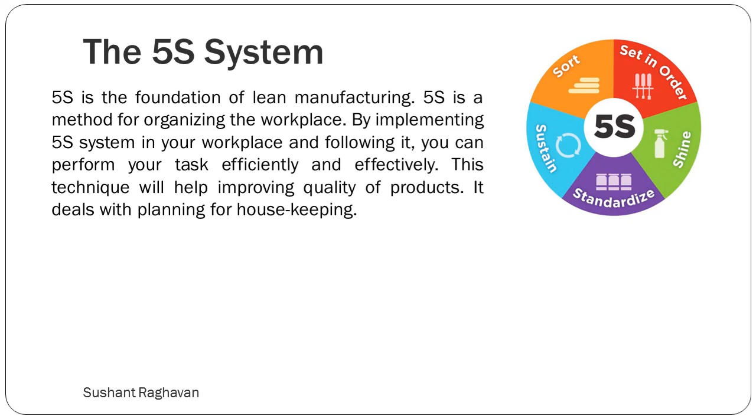5S is the foundation of lean manufacturing. It is a method for organizing the workplace. By implementing the 5S system in your workplace and following it, you can perform your tasks efficiently and effectively. This technique will help improve the quality of products. It deals with planning for housekeeping.

In the early 20th century, the manufacturing industry witnessed a significant shift as it switched over to mass production. The manufacturers were now setting eyes on international markets. In this race to gain market share, companies had to improve upon a number of factors such as efficiency, waste, speed, and consistency to surpass their regional and international competition.

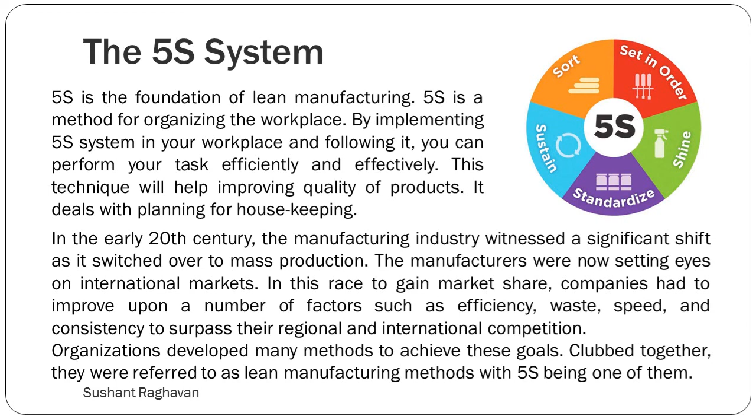Organizations developed many methods to achieve these goals. Clubbed together, they were referred to as lean manufacturing methods, with 5S being one of them.

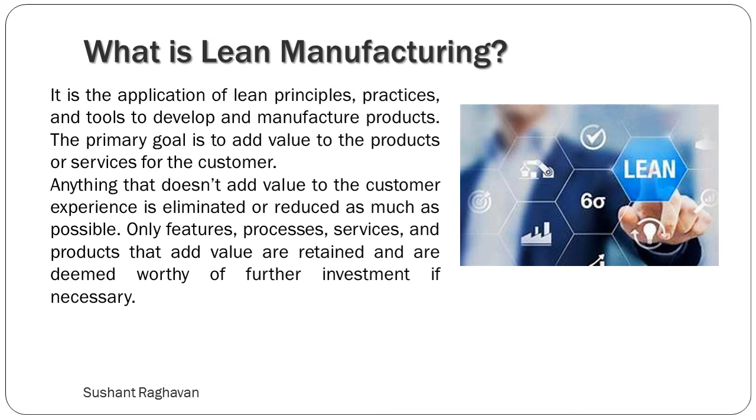What is lean manufacturing? It is the application of lean principles, practices, and tools to develop and manufacture products. The primary goal is to add value to the products or services for the customer. Anything that does not add value to the customer experience is eliminated or reduced as much as possible. Only features, processes, services, and products that add value are retained and are deemed worthy of further investment if necessary.

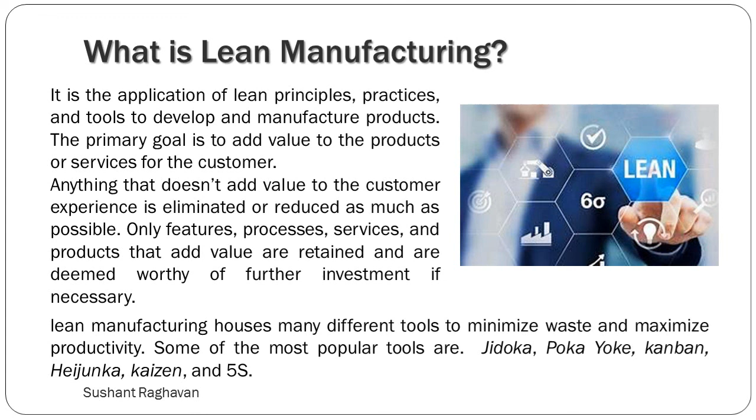Lean manufacturing houses many different tools to minimize waste and maximize productivity. Some of the most important tools are Jidoka, Poka Yoke, Kanban, Heijunka, Kaizen, and 5S.

What is 5S? 5S is a 5-step process to improve workplace efficiency developed by Hiroyuki Hirano. It originated in Japan, where the 5 steps are known as Seiri, Seiton, Seiso, Seiketsu, and Shitsuke. These steps, when put into practice, will reduce waste and elevate the safety standards of companies.

A cluttered workplace can lead to part and tool misplacements, mistakes, production slowdown, and even injury. This can affect production efficiency and cause a loss of reputation. By organizing the workplace, employees can avoid such instances and all departments can function just as they should.

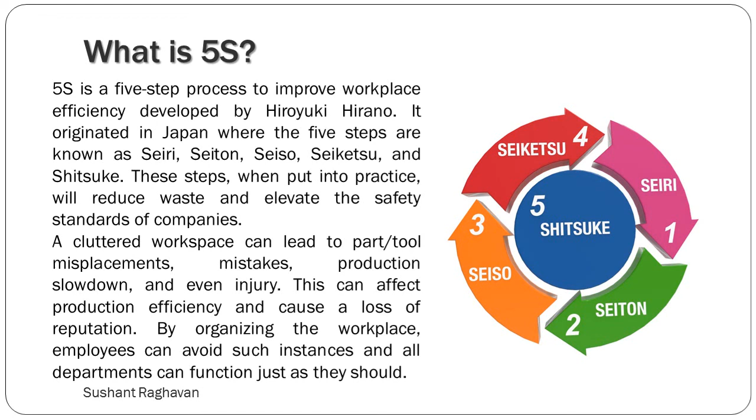5S steps. 5S is an extremely flexible technique that can adjust to different time scales as needed. The 5 steps in 5S are as follows.

Sort: clearly distinguish needed items from unneeded and eliminate the latter. Set in order: keep needed items in the correct place to allow for easy and immediate retrieval. Shine: keep the workplace neat and clean. Standardize: the method by which sort, set in order, and shine are made habitual. Sustain: maintain established procedures. Sort.

The first step in 5S is sort. In this step, the participants sort through their tools and equipment at the workstation and transfer them to their designated storage locations. It also entails the removal of parts, tools, equipment, and materials from the workplace that aren't necessary for the moment. Employees either move them to storage areas or discard them.

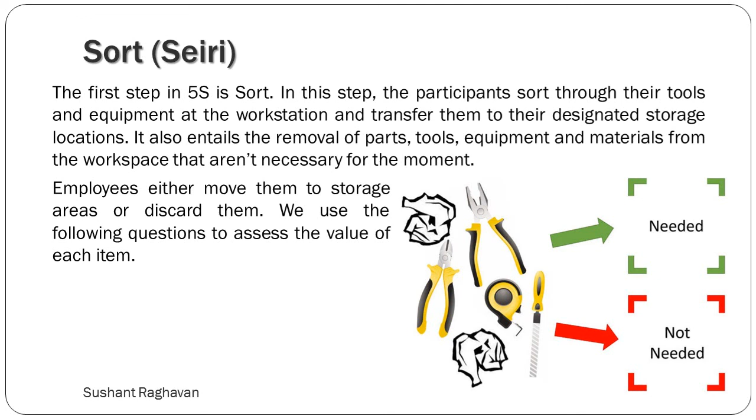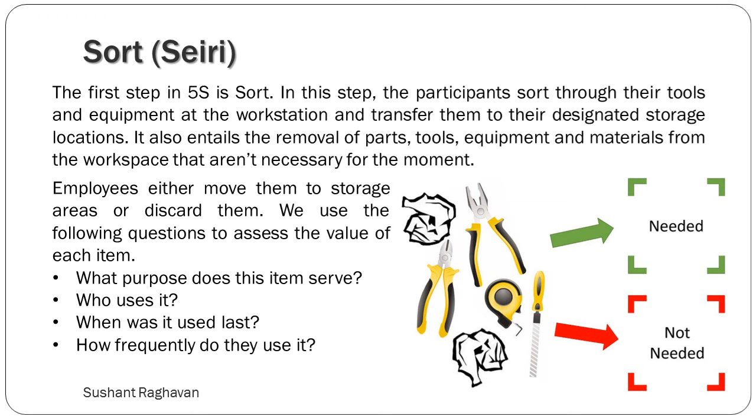We use the following questions to assess the value of each item: What purpose does this item serve? Who uses it? When was it last used? How frequently do they use it? And is it really necessary to keep it here?

The employees using that workstation are in the best position to answer the above questions. They can use the answers to sort items into different categories. The 5S program guides suggest 3 or 4 categories to sort items into.

The 4 categories are: keep, observe, discard, and transfer.

Keep: this category is for items that the employees use frequently. The employees keep them within reach so that minimum time is needed to procure them. We return these items to the target area for the employees' use.

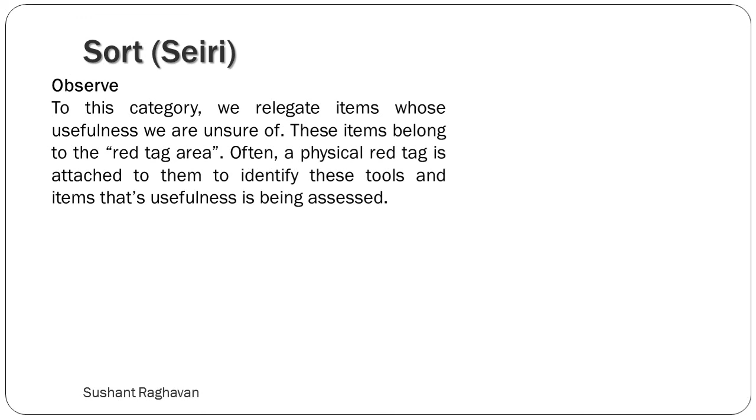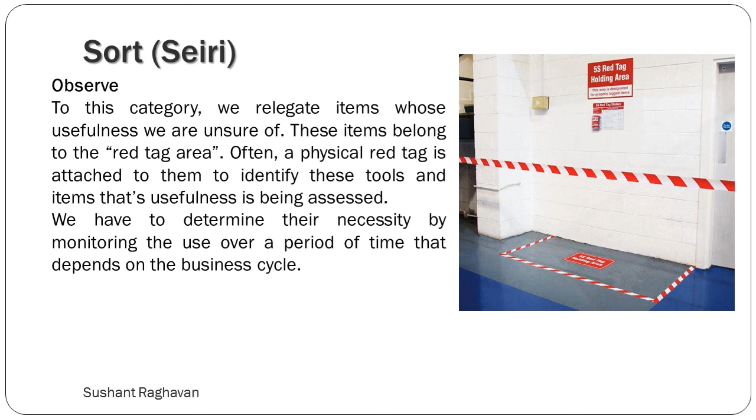Observe. To this category, we relegate items whose usefulness we are unsure of. These items belong to the red tag area. Often a physical red tag is attached to them to identify these tools and items whose usefulness is being assessed. We have to determine their necessity by monitoring the use over a period of time that depends on the business cycle.

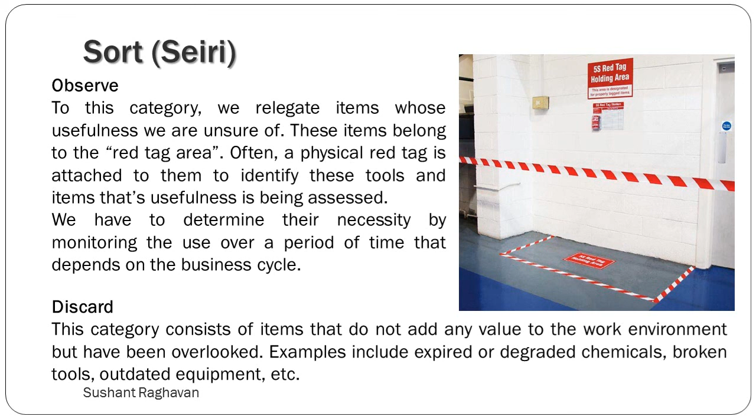Discard. This category consists of items that do not add any value to the work environment but have been overlooked. Examples include expired or degraded chemicals, broken tools, outdated equipment, etc.

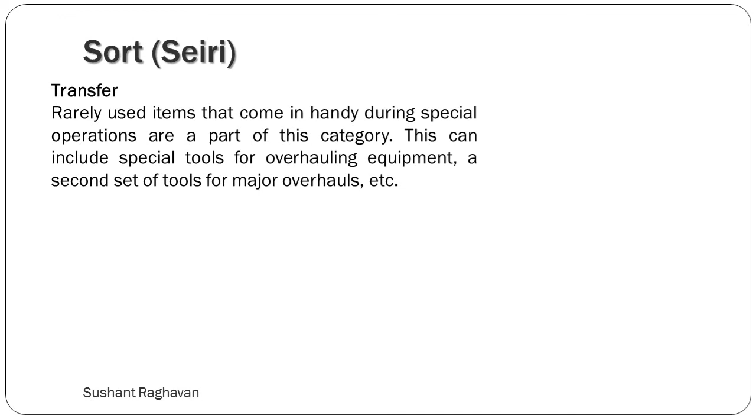Transfer. Rarely used items that come in handy during special operations are a part of this category. This can include special tools for overhauling equipment, a second set of tools for major overhauls, etc. Depending on the nature of items, employees will either store them in a special storage area or move them to a department where they would make more sense.

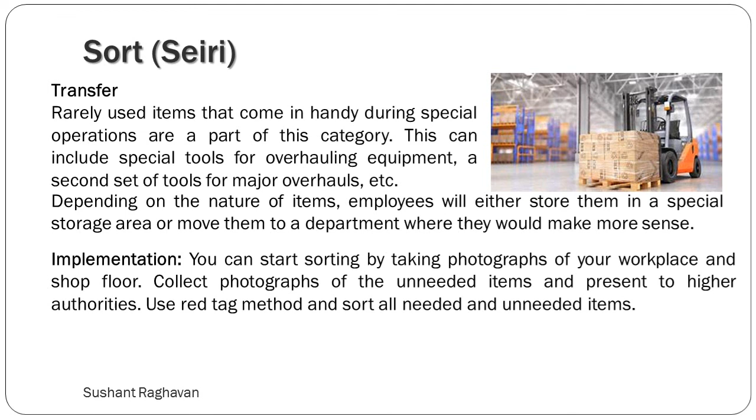Implementation. You can start sorting by taking photographs of your workplace and shop floor, collect photographs of the unneeded items, and present them to higher authorities. Use red tag methods and sort all needed and unneeded items. Remove unneeded items from your work area.

The frequency of sorting will be based on the application. It can be weekly, monthly, quarterly, or annually for spaces such as storehouses or filing cabinets. Some applications may need a daily sorting routine.

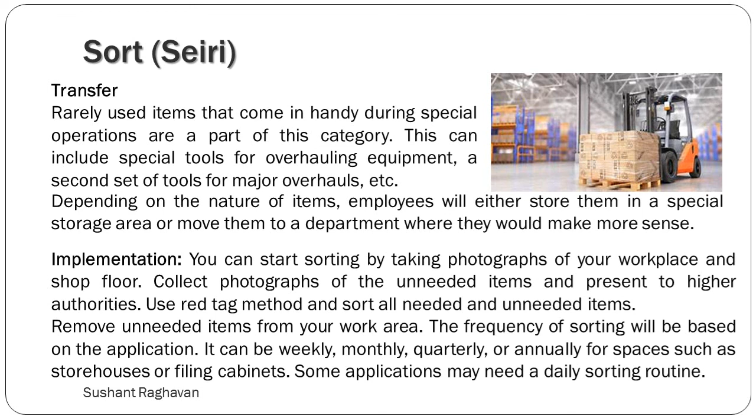Set in order. The second step in the 5S process is set in order. Once the first step is complete, the employees are only left with items that are required for the workstation to run effectively. They can further improve efficiency by arranging the items in a way that promotes minimal motion, transportation, and waiting time.

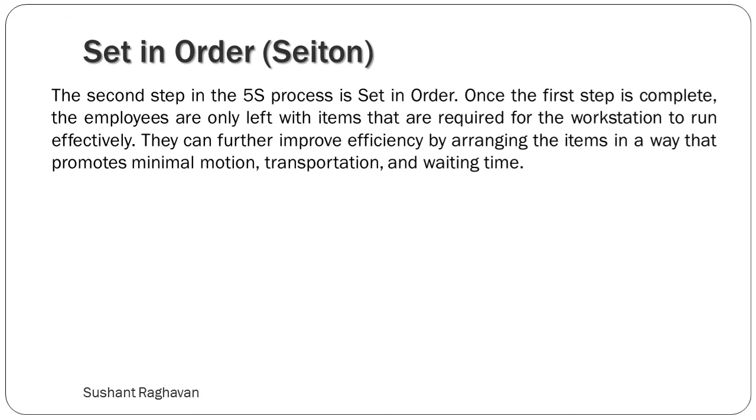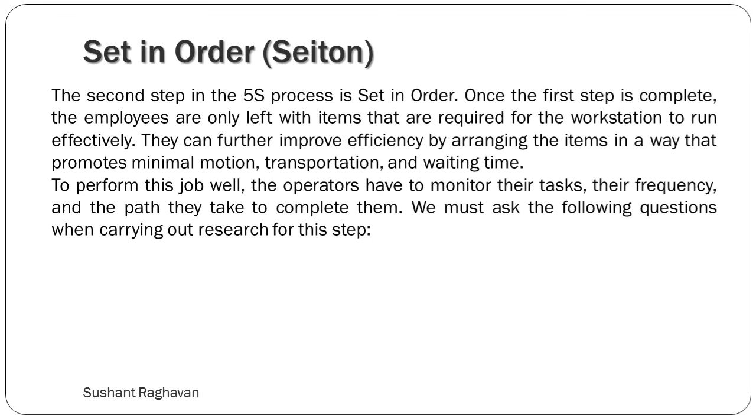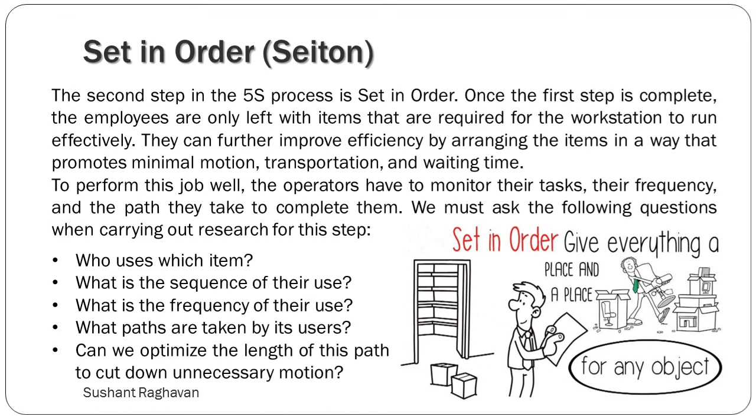To perform this job well, the operators have to monitor their tasks, their frequency, and the path they take to complete them. We must ask the following questions when carrying out research for this step: Who uses which item? What is the sequence of their use? What is the frequency of their use? What path is taken by its users? Can we optimize the length of this path to cut down unnecessary motion?

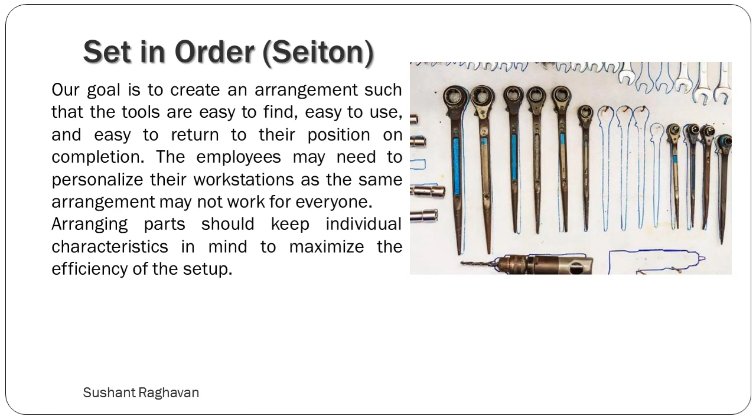Our goal is to create an arrangement such that the tools are easy to find, easy to use, and easy to return to their position on completion. The employees may need to personalize their workstations as the same arrangement may not work for everyone. Arranging parts should keep individual characteristics in mind to maximize the efficiency of the setup.

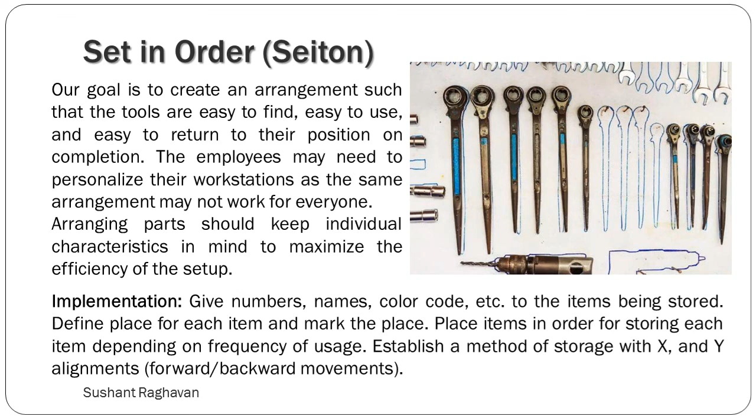Implementation. Give numbers, names, color codes, etc. to the items being stored. Define a place for each item and mark the place. Place items in order for storing each item depending on frequency of usage. Establish a method of storage with X and Y alignments, forward-backward movements.

Shine. After the objects have been sorted and transferred to their designated places, the third step in 5S comes into the picture. The aim of Shine is to have a clean workplace. It strives to build a routine, daily if necessary, to ensure that the workplace is free of any dirt or grime that inevitably builds up.

The cleaning of a work environment must not be left to the janitorial staff alone. Everyone who uses a workplace is responsible for its cleanliness. This can be done by means of thorough dusting, sweeping, vacuuming, surface wipe down, mopping, polishing, etc.

Putting away used equipment is just as important. This task makes the workers feel more accountable for their workstation. This feeling translates into greater investment in the job carried out and high quality results.

Implementation. In the Shine stage, you decide what to clean (the item, equipment), how to clean (methods, procedures), when to clean (frequency of cleaning job to perform). In a garment factory shop floor, we observed that operators shine their machines and workplace twice a day for 3 minutes. They get an alarm when it is time for the cleaning job.

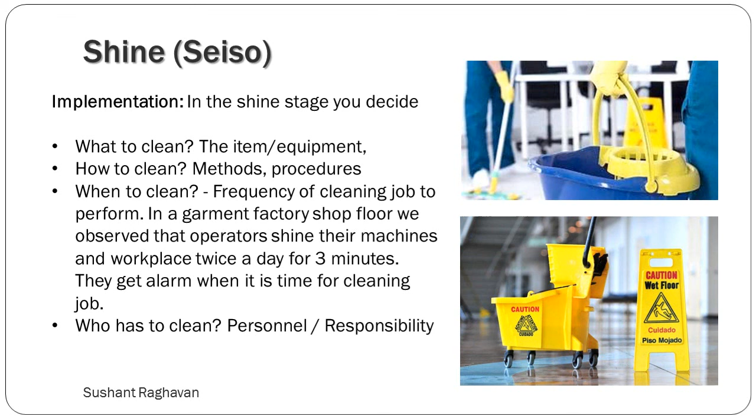Who has to clean? Personnel, responsibility. Where to clean the area.

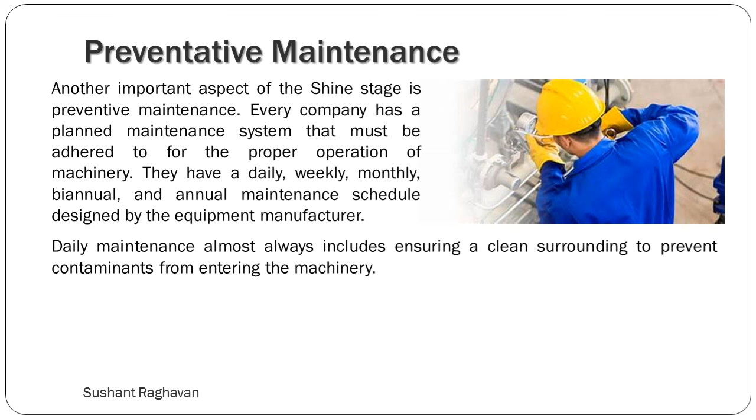Preventive maintenance. Another important aspect of the Shine stage is preventive maintenance. Every company has a planned maintenance system that must be adhered to for the proper operation of the machinery. It has a daily, weekly, monthly, biannual, and annual maintenance schedule designed by the equipment manufacturer. Daily maintenance almost always includes ensuring a clean surrounding to prevent contaminants from entering the machinery.

Adhering to these maintenance routines leads to a longer machine lifespan and fewer breakdowns. This ultimately causes time savings and prevents any losses due to work stoppage. 5S naturally leads to total productive maintenance. TPM is the key to machine stability and effectiveness.

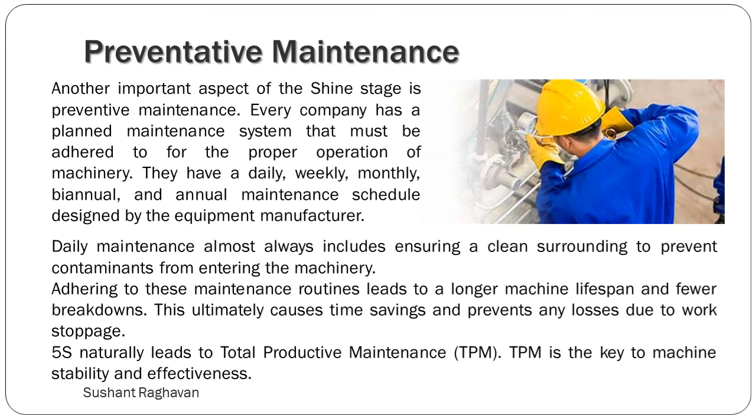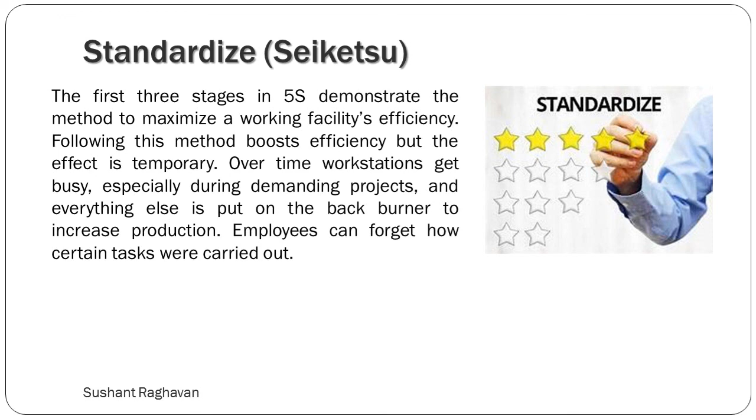Standardize. The first three stages in 5S demonstrate the method to maximize a working facility's efficiency. Following this method boosts efficiency, but the effect is temporary. Over time, workstations get busy, especially during demanding projects, and everything else is put on the back burner to increase production. Employees can forget how certain tasks were carried out. This is where the fourth step comes in.

The primary objective of the standardization step is to provide SOPs for 5S implementation. It creates a system that turns individual instances of cleaning sprees into habits. It provides task descriptions, schedules, checklists, and inspection criteria for the tasks. Such a universal system is crucial to ensure all people are on the same page with regard to a certain job.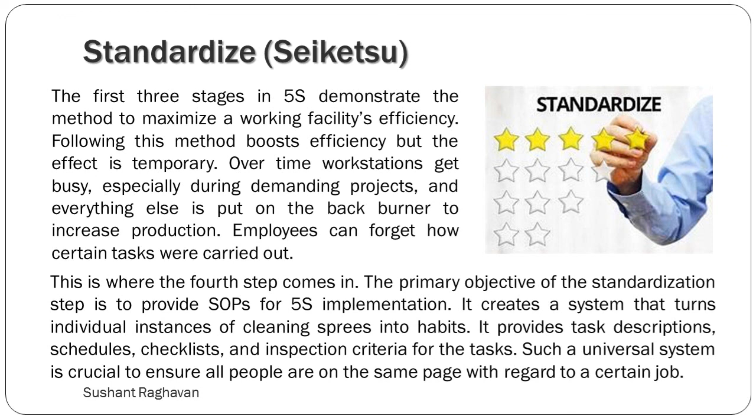These SOPs inform the employees as well as the senior management of their tasks, how they are expected to do them, and how to inspect them. It defines the expected frequency as well as the quality of work. Some tasks may need to be performed every day, while some others may be performed at greater intervals. Standardizing 5S activities brings consistency in an organization.

Implementation. Prepare a 5S scorecard for workplaces and standard checking schedule. For example, a 5-minute end of shift 5S. This ensures that employees hand over their work area in a good condition to the next shift. The last 5 minutes of end of shift will result in increased productivity by the following shift as the mess is cleared and no mess is there, and higher output.

Sustain. The 5S program with all its standards is now in place, but as with many programs, the initial excitement of a 5S program can fizzle out over time. The fifth step strives to consolidate 5S in place by creating constant reminders for the workers to implement 5S in the best possible manner. It also involves training and getting more and more people involved in the 5S program. The goal is to make 5S an integral part of the organization's work culture. This is the only way to harness the benefits of a 5S culture.

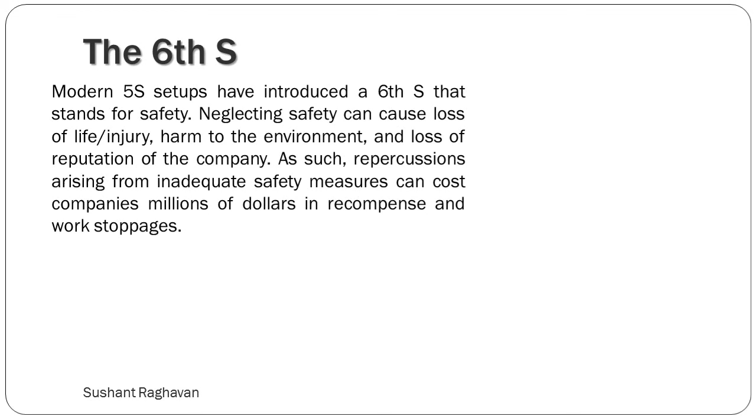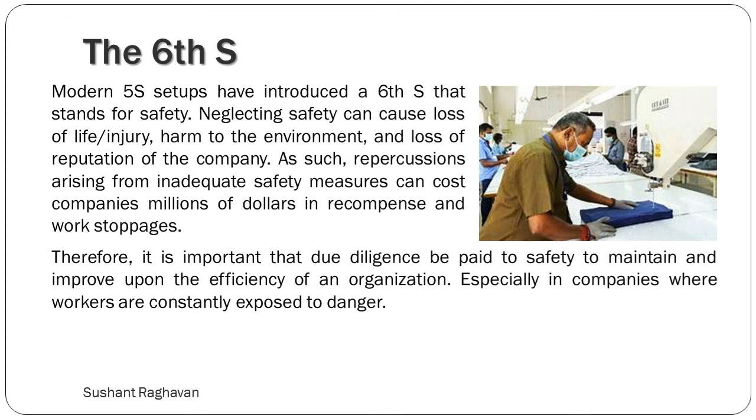Modern 5S setups have introduced a sixth S that stands for safety. Neglecting safety can cause loss of life, injury, harm to the environment, and loss of reputation of the company. As such, repercussions arising from inadequate safety measures can cost companies millions of dollars in recompense and work stoppages. Therefore, it is important that due diligence be paid to safety to maintain and improve upon the efficiency of an organization, especially in companies where workers are constantly exposed to danger.

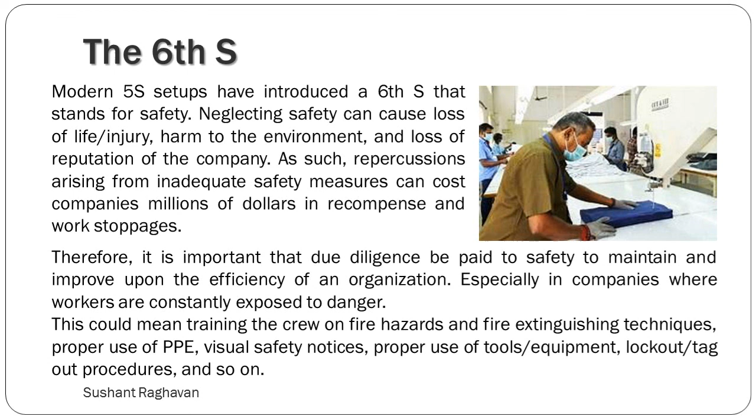This could mean training the crew on fire hazards and fire extinguishing techniques, proper use of PPE, visual safety notices, proper use of tools, equipment, lockout, tagout procedures, and so on. The proper implementation of 5S can introduce a robust safety culture that prevents many mishaps.

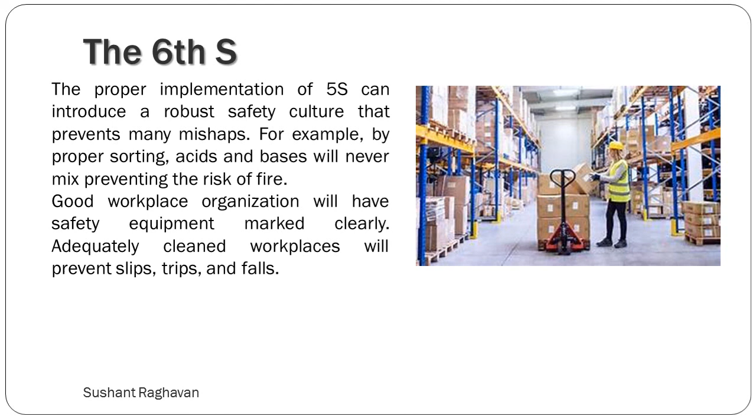For example, by proper sorting, acids and bases will never mix, preventing the risk of fire. Good workplace organization will have safety equipment marked clearly. Adequately cleaned workplaces will prevent slips, trips, and falls.

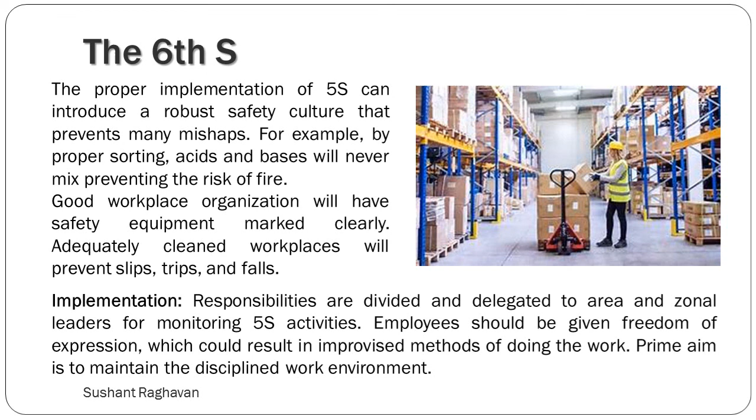Implementation. Responsibilities are divided and delegated to area and zonal leaders for monitoring 5S activities. Employees should be given freedom of expression which could result in improvised method of doing the work. Prime aim is to maintain the disciplined work environment.

Benefits of 5S. The 5S method provides many benefits. A well-rounded 5S system can improve the efficiency of a company anywhere between 10 to 30%. It can cause remarkable changes in the way an organization is run, even for those that thought there was no scope of improvement. The following benefits can be noticed: organized workplace, improved employee performance, improved product service quality, improved visibility of items and equipment, reduced wastage, improved employee morale, and fewer mishaps.